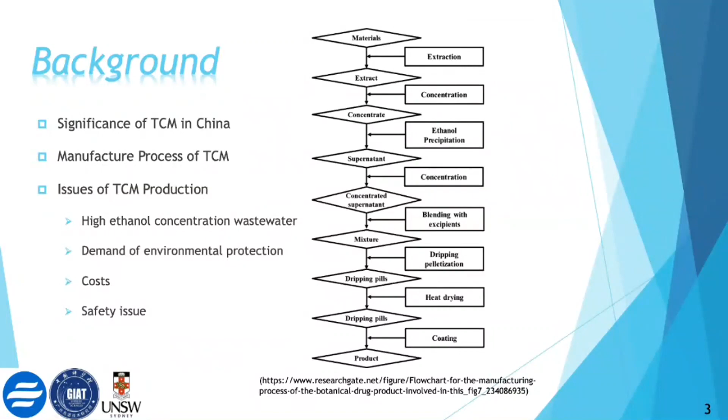As shown in this flowchart, the overall manufacturing process of TCM products includes multiple steps, and it is actually struggling to meet the requirements of environmentally friendly and sustainable production. That is mainly due to the significant amount of wastewater produced in the process. Researchers have shown that when total TCM product output exceeds 1,000 tons, every ton of final TCM product means 130 tons of wastewater will be generated at the same time.

And the wastewater actually contains a significant amount of ethanol because ethanol is a general solvent, also a precipitant, used in the extraction of TCM. The large consumption of fresh ethanol also results in the high cost of the process, especially if it's not reused. And because ethanol is highly flammable, the storage of ethanol is actually another potential safety risk. Therefore, the efficient recovery of ethanol is crucial for the development of modern TCM production.

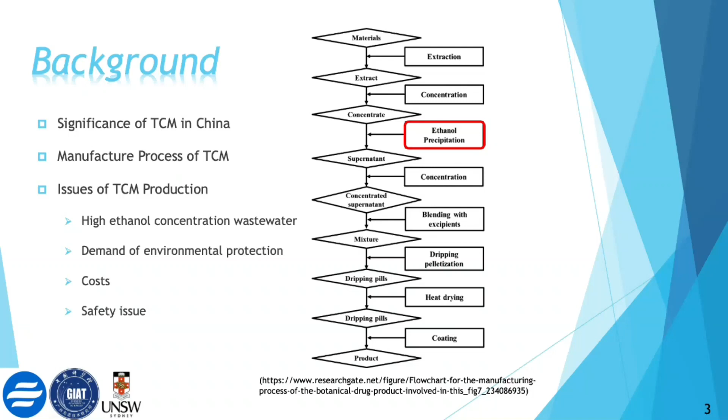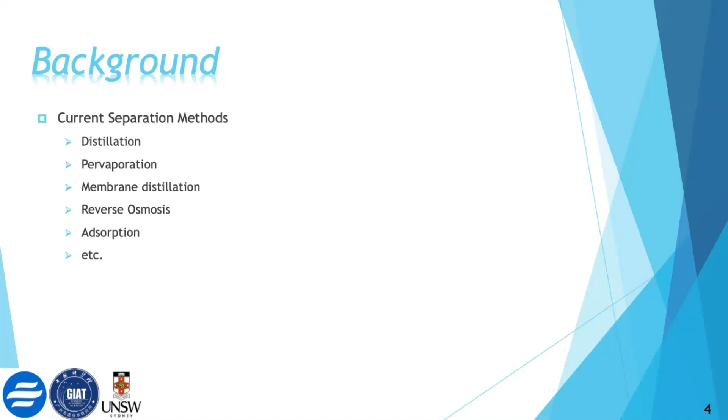Currently, there are several separation techniques that can be used to recycle ethanol from the TCM wastewater, including distillation, pervaporation, membrane distillation, reverse osmosis, adsorption, etc. Pervaporation has been regarded as one suitable choice due to its non-toxic nature and simple mechanism. As shown in this figure, the PV process is driven by the partial pressure difference and concentration difference. The desired component could pass through the membrane based on the selective dissolution and diffusion mechanism in the vaporizing process.

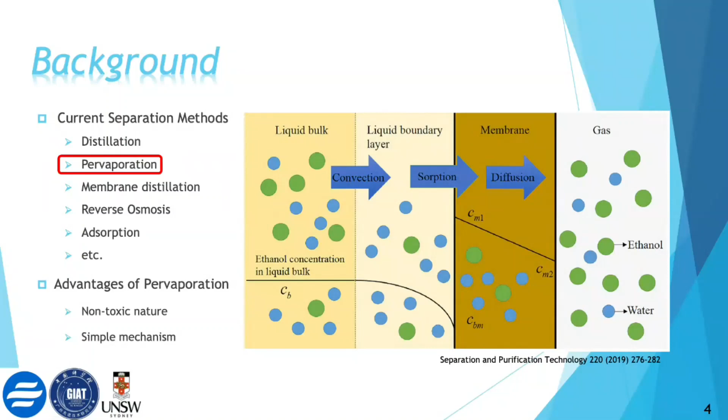And as mentioned before, we all know that the distillation column is one of the most commonly used technologies to recycle ethanol, especially when ethanol concentration is significantly high. As shown in this flow diagram, normally in a TCM manufacturing plant, the wastewater discharged from the production line will be first treated by the distillation column, and when the concentration of the vaporized ethanol is greater than 92%, it will then be transferred into an ethanol storage tank for subsequent use.

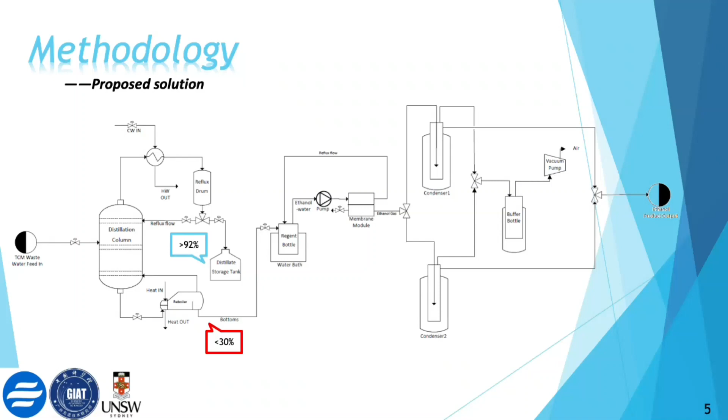On the other hand, when the ethanol concentration at the bottom of the distillation column falls below 30%, it's just discharged directly. But actually in this case, we can feed the bottom solution to the pervaporation system for further recycling treatment. So in this work, a bench-scale pervaporation setup was applied and a specific membrane module was designed. During the PV test, the TCM wastewater will be kept at a certain temperature and then pumped through the membrane module and then go back to the reservoir.

And inside the module, the mixture solution will be forced to travel all the way through this long and curvy channel, in constant contact with the membrane pressed on top. This curvy maze-like channel design is to maximize the contact area and contact time between the membrane and the feed solution. The vaporized ethanol will then permeate through the membrane under vacuum and condense in the cold trap, and this buffer bottle is just to protect the vacuum pump.

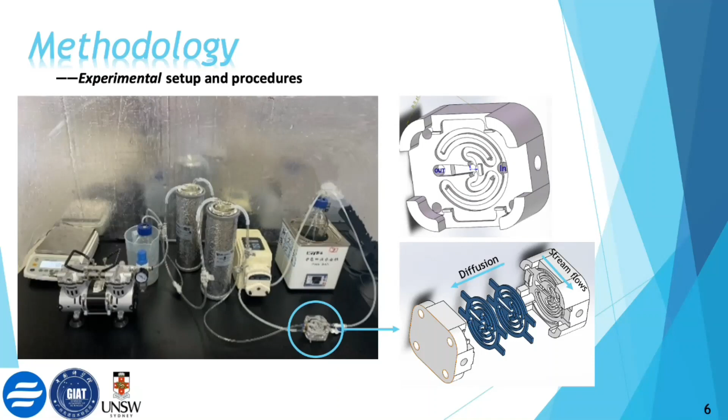The whole experimental cycle will last for 6 hours, and the permeate in the cold trap will be collected every 1.5 hours. The ethanol concentration in the feed, retentate, and permeate will be determined using gas chromatography. In our preliminary study, we have prepared some PV membranes by simply coating a layer of PDMS on the support material by casting, followed by curing and solvent evaporation. The PDMS we used was Sylgard 184, the solvent was isooctane, and the supporting material was PAN ultrafiltration membranes.

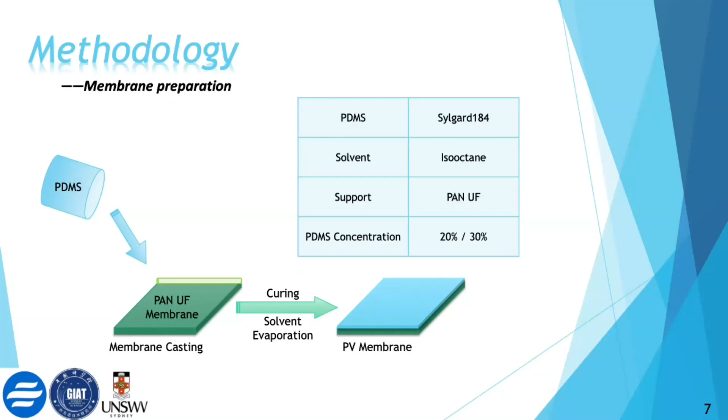PDMS dope solutions with 2 different concentrations have been used to prepare the PV membranes. So we first studied the effect of PDMS concentration on the ethanol recovery efficiency of the prepared membranes. Because the project is still in the initial phase and given limited time, we just used ethanol-water mixture solution instead of real TCM wastewater to carry out the experiment.

The initial alcohol concentration in the feed solution was fixed at 157.86 gram per liter, and the table on the top summarized the experimental conditions of the PV test. The table at the bottom indicates the flux of the 2 membranes, and the figure shows the concentration change.

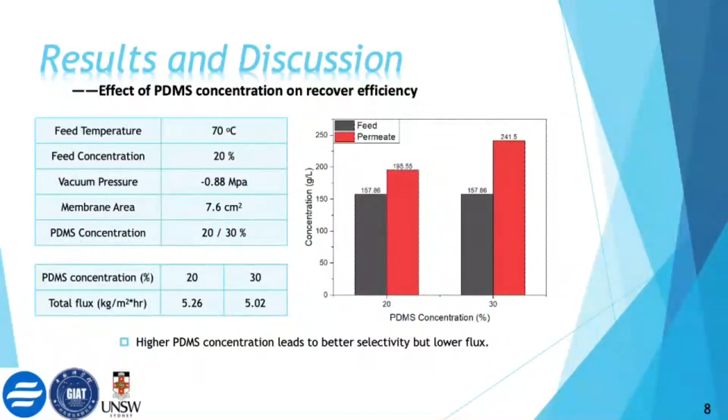It can be observed that the membrane made by 30% PDMS concentration has very obviously higher selectivity with a slightly lower flux. This is because the higher PDMS concentration made the membrane surface more hydrophobic. So in this case, even if some water molecules are also vaporized due to the high temperature, it is still hard for them to penetrate into the membrane and pass through to the permeate side. So based on these results, we decided to use 30% PDMS membranes in all the following experiments.

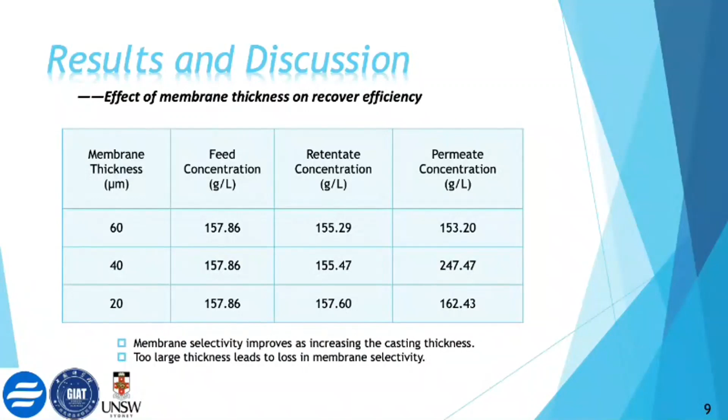However, if we increase the membrane thickness further to 60 micron, then the membrane selectivity for ethanol disappeared, which was quite unexpected. And we guess this may be attributed to the significant high diffusion resistance due to the ultra-thick coating layer. So in this case, both ethanol and water molecules were impeded by the coating layer itself. Another possible reason is that our self-made membranes may have some defects or pinholes, which will also reduce the membrane selectivity. Further experiments will be conducted to explore the exact reasons behind this unusual phenomenon.

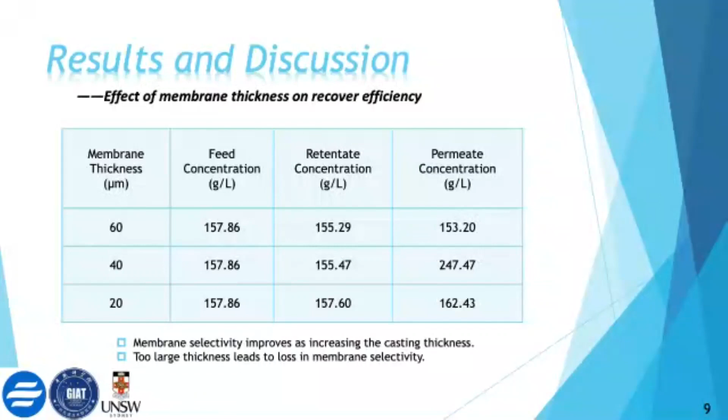When the feed temperature goes higher, the free volume in the membrane will increase, so the diffusion rate of the molecules through the membrane will also increase, resulting in a higher permeation flux. And also, the equilibrium vapor pressure of the molecules will increase as temperature increases, which gives a larger driving force for the whole PV process. And this also contributes to the higher flux.

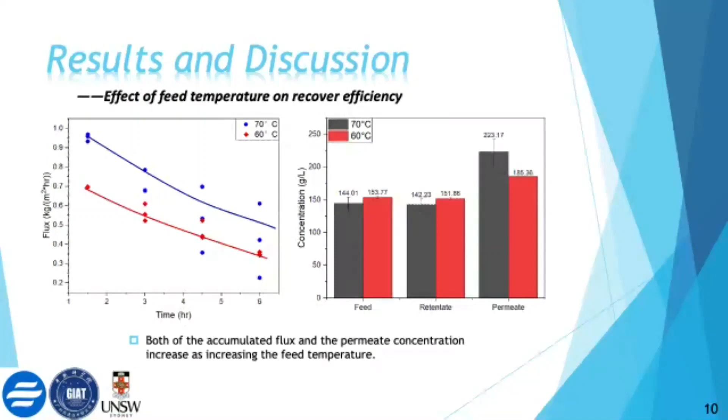So to sum up, basically, the pervaporation system for ethanol recycling from the TCM wastewater has been found to be technically feasible, and we have conducted a series of experiments to develop a possible design for the PV test. It was found that the optimal design is to conduct the PV test at 70 degrees Celsius, use 40 micron thick membranes, which are prepared from the 30% PDMS solution.

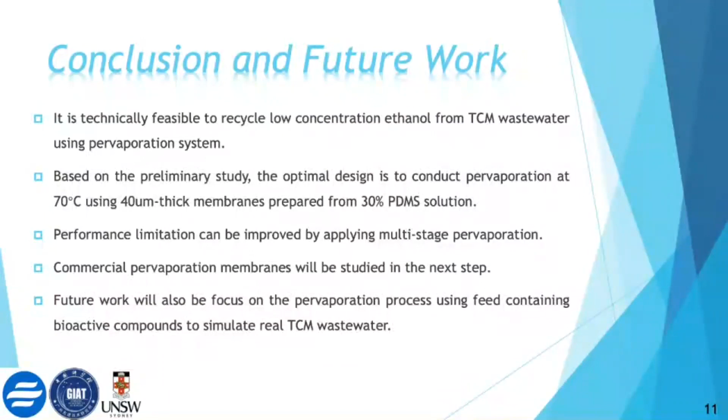However, there are still some limitations in this research that can be further improved. For example, our self-made membranes can recover some ethanol indeed, but the selectivity is poor. This can be further optimized by applying multi-stage pervaporation. And we also plan to purchase different types of commercial PV membranes to evaluate their performance in our system as well. And furthermore, we will add some bioactive compounds of TCM into the feed in future work to better mimic real TCM wastewater. And that's all for my presentation.